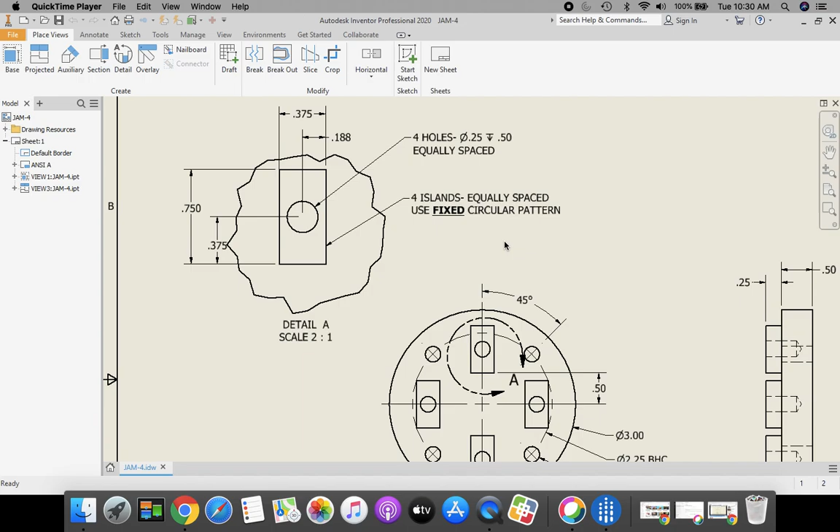We're also going to specify how to get this bolt circle to go around here, show you how to do that, and apply some center marks, all of which is new, along with an angular dimension as well. Let's have a little fun creating this IDW.

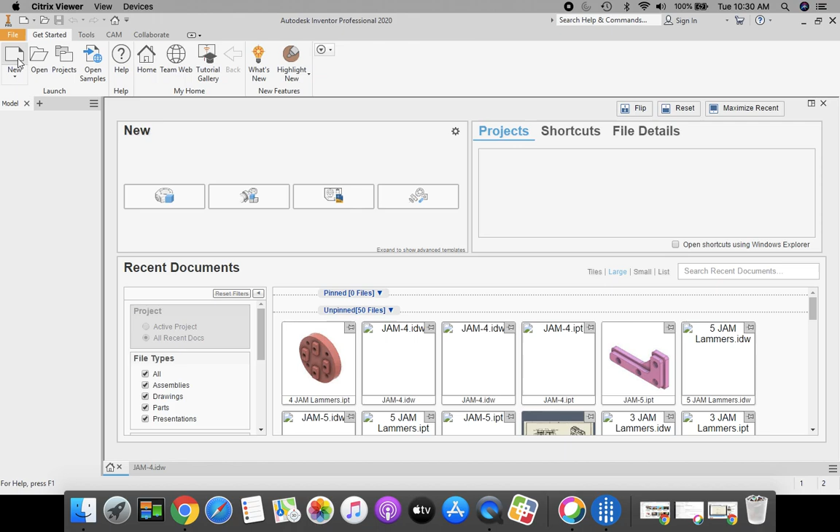In Inventor, we're going to go up to the top in our ribbon bar, select New, Standard IDW, this icon right here, and click Create.

Once again, we're going to change our sheet size from a D size sheet to a B size. So sheet size 1 over here. Put your cursor on sheet 1 in our model browser, right click, edit sheet, and we're going to choose B, and click OK.

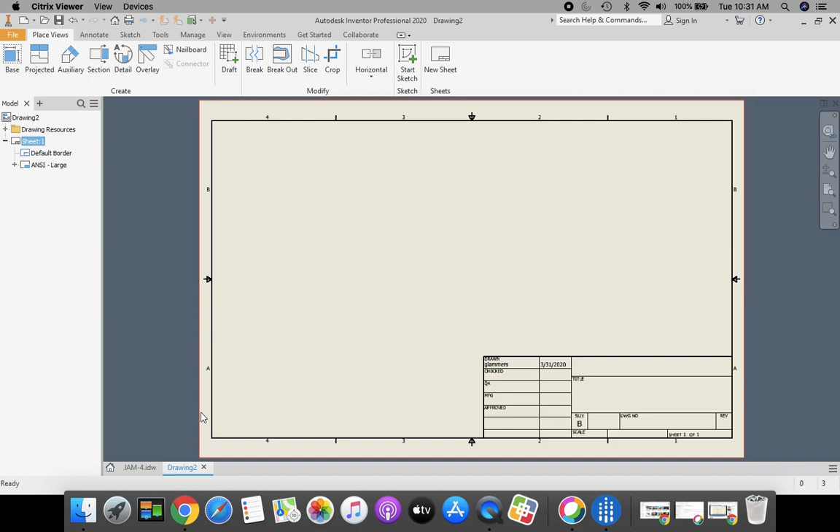That looks good. Next, let's place our view. Let's go up to the top in our ribbon bar and click Base. Go to your Browse folder with the magnifying glass.

You're going to scroll all the way down in your H drive and find your part. This is for Jam. My H drive is up here, gray box, green line underneath. Find your part, click Open.

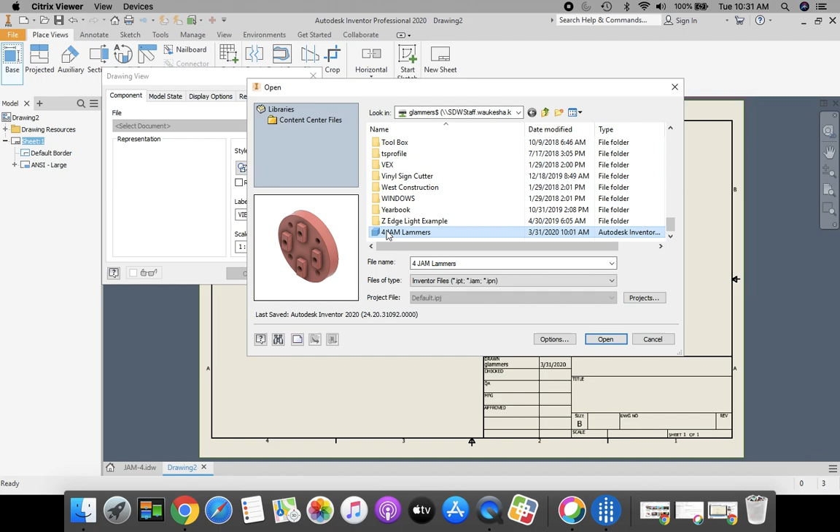Click OK. And I'm going to take my cursor and push my front view somewhere about here.

Next, I'm going to come up to the top and select Projected from our ribbon bar. Now, I have this part already attached to mine. However, if you click Projected and there's nothing attached to your cursor, bring your mouse to your front view, click, and it will connect for you.

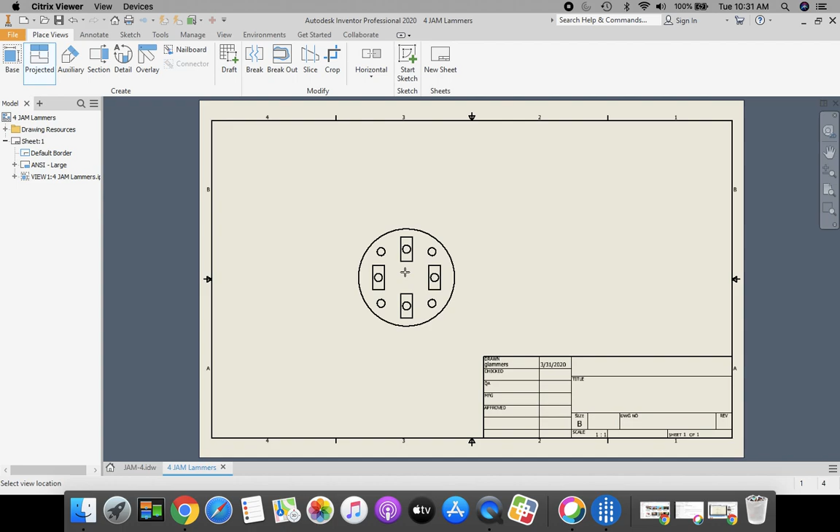And then we're going to place a right side view, a pictorial isometric view. Move your mouse up to the top right corner, and then right click and create. Those of you using your iPad may have to go up to that pull down window shade at the top and use your mouse tool in order to get the right click feature to create.

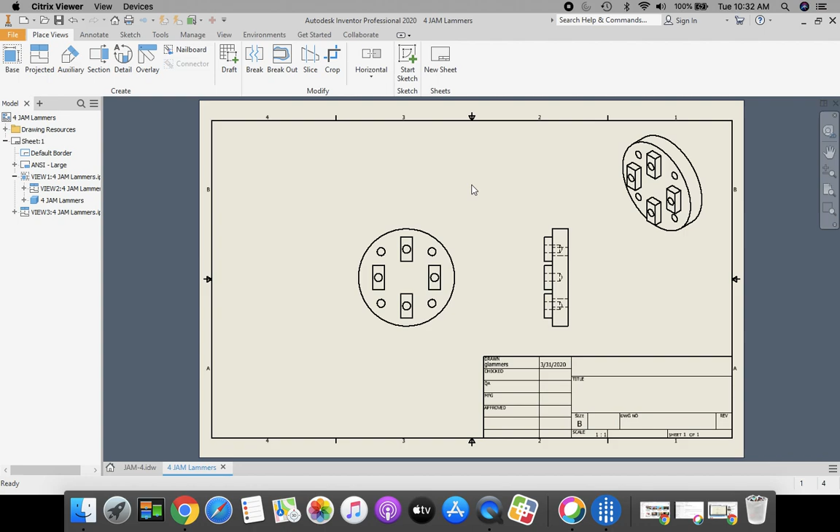Okay, now let's take a look at our front view here. We've worked with base, projected, and we did section in the last couple of these. Now we're going to go on to our detail. We're going to give a detail a try.

So click the detail tool. Now the way this works, you put your mouse where you want it to go, and it's kind of the center of that circle. You're going to click. That opens up this menu here.

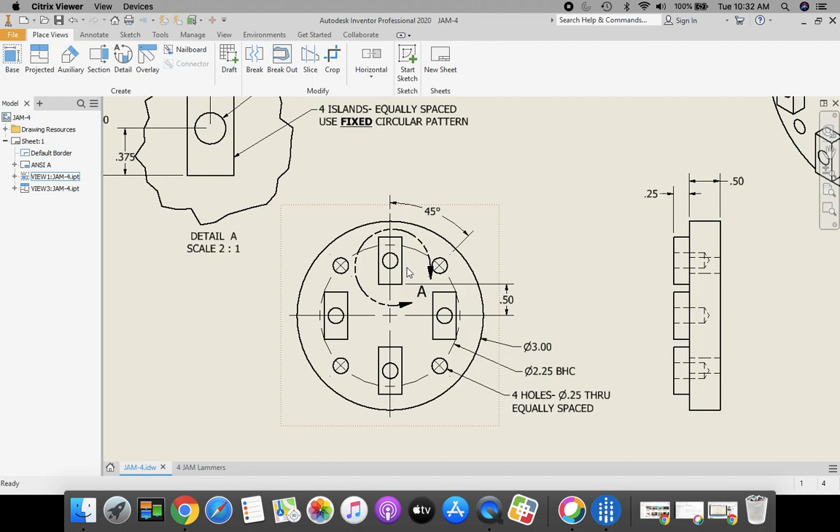Now we want the center of where we want that view circle to be. So if you take a look at this, do you see how it's going to create this detailed view? So where's the center of that? You can see I chose that right there.

So on my drawing, I'm going to click kind of the center of this circle as a good reference. Click, and I'm going to start stretching out this circle. Notice that anytime if you're not happy with the way that it's looking, just press escape and try it again.

Detail, click once to get that menu to pop up. Then we're going to click and stretch out a circle. It doesn't have to be perfect. We just want that full island in the middle of that circle.

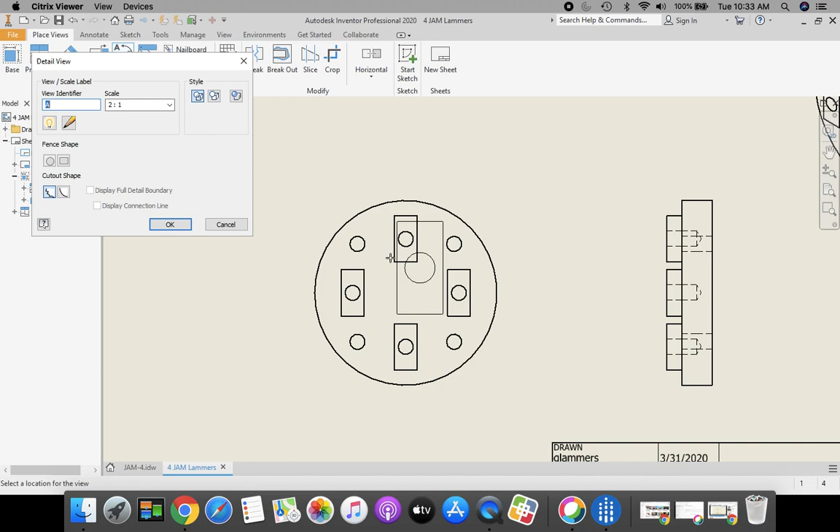Once you're happy, click, and now I have it attached to my cursor. Zoom all, magnifying glass piece of paper, and I'm going to come over here to the left-hand side of my page, and I'm going to click.

You can also take and move this around just like you can any other view that's in there. So after you place your dimensions, if you don't have enough room at the top, you can slide it down. Notice how the cutout version here around the outside looks different than the cutout version that's along my sheet.

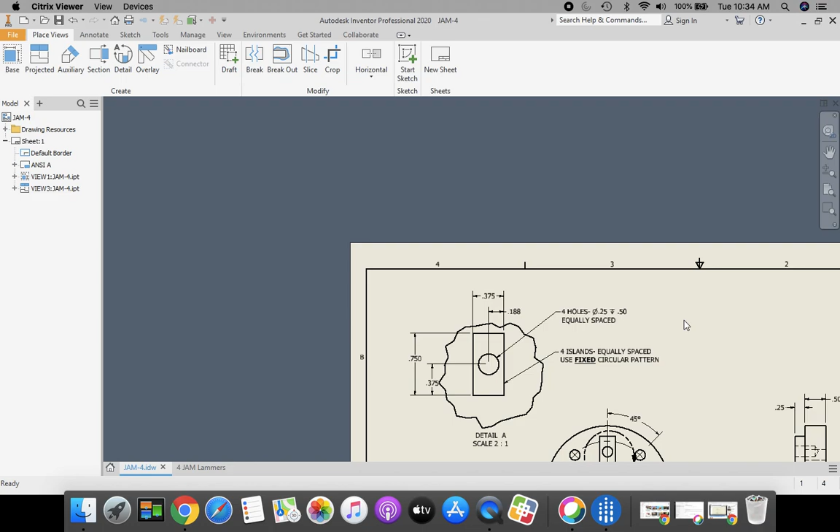And that's okay. That's just computer generated to show that it's material that's around there. So however it shows up is how it shows up. The main important part is this detailed area.

Now let's move on to our dimensions. Click your Annotate tab at the top. We're going to place our dimensions on, once again just matching the PDF drawing that we had originally created.

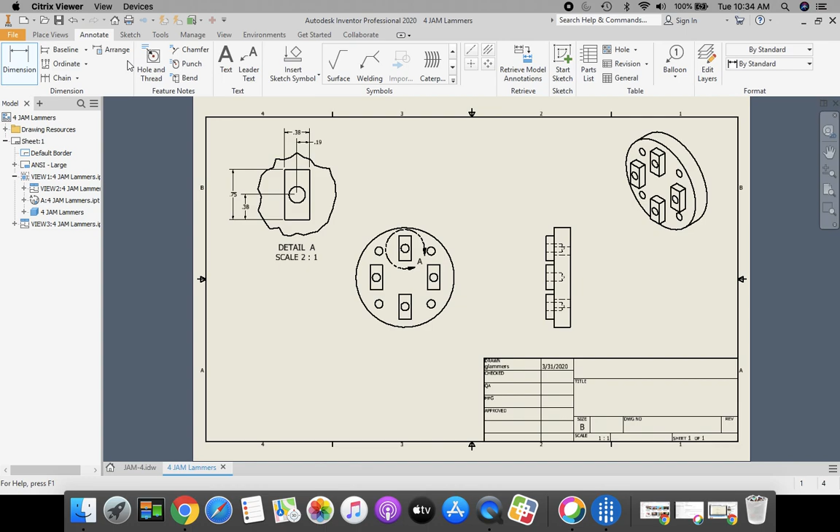We're going to place all those on, just matching the same ones that are there. For the hole that's in the middle, remember we used the hole and thread tool.

Okay, if you wanted to place a dimension on there for islands, we would have to use this leader and text.

So you can click on that, touch a spot on your island, bring that out, press enter with your keyboard, and then you can type

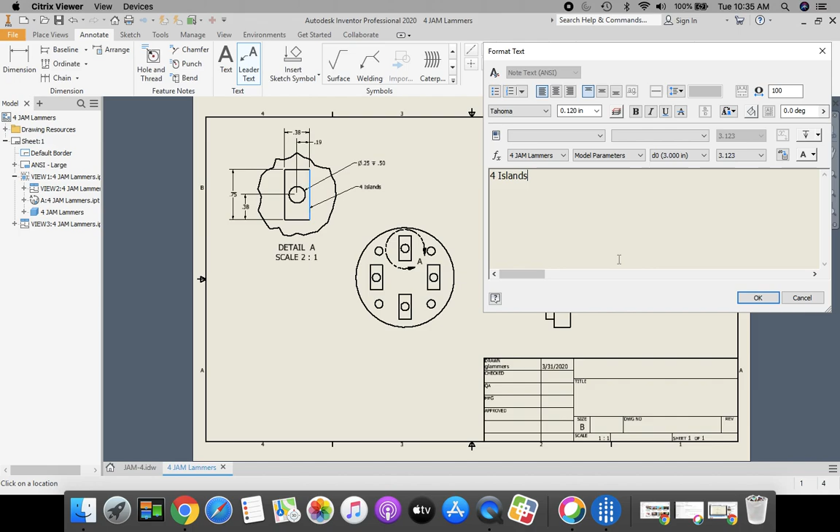4 islands and whatever other information you want to put in there. And when you're finished, just click OK, and it adds that note in there for us as well.

Let's move on, keep going around our dimensions. Let's take a look at our side view and our front view. So my side view, I have my thickness dimension and the thickness of those islands.

You see how that puts my 0.25 to the inside? I have to reverse that. So click the left side first, then the right side, and that'll put it into the right spot for you so that your dimensions are not overlapping.

Still with my dimension tool, I can click the outside of my circle here to place the overall dimension. I can place my hole dimension. Now I don't have to do anything with the islands because those are already specified up in the top.

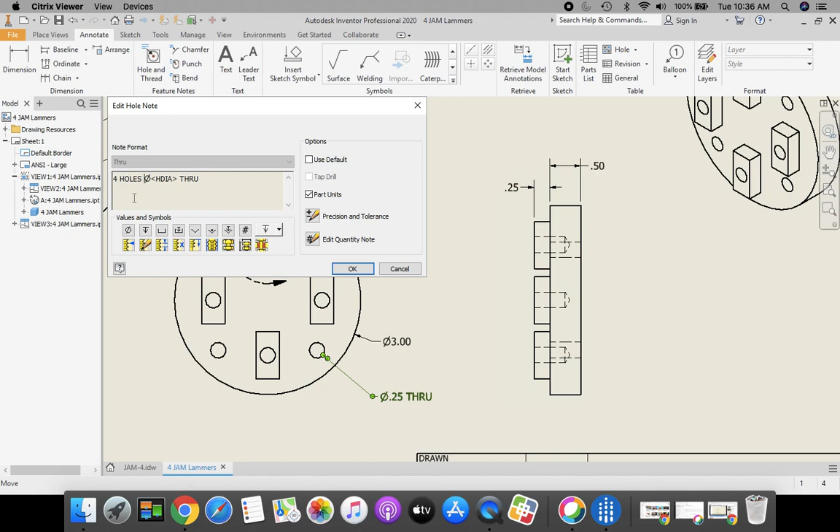I need this hole identified though. And if I want to, I can click on this dimension, put my cursor in the front window here, and add an additional note, 4 holes, click OK, and it adds it to my dimension down here.

Okay, that's cool. Now, if you take a look, I have that bolt hole circle going around here, and I have some other lines that are on here like this center mark. So we're going to show you how to do those because we need these center lines on there in order

to create my 45-degree dimension and to get this diameter for the bolt hole circle. Okay, let's show you how to do that.

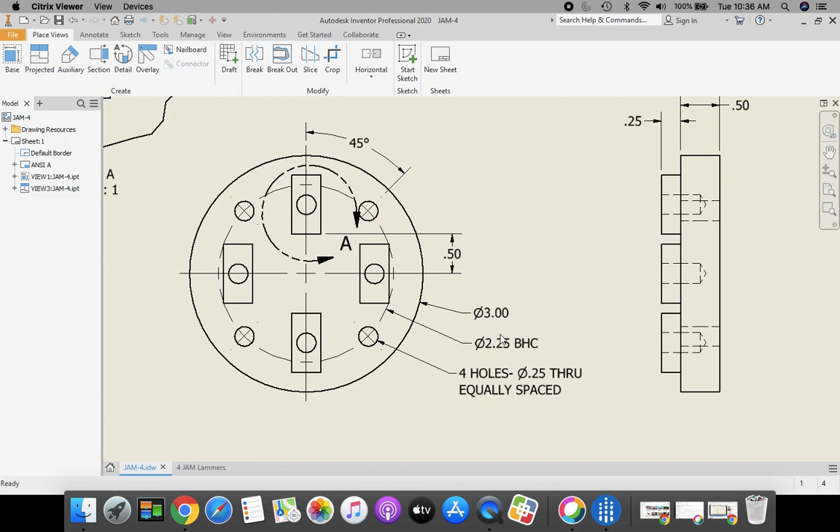Up in the top in our ribbon bar, I'm going to come up to my first area here where I have my center marks. I'm going to click that lower left one, that's a plain center mark, and I'm going to click the outside of my circle. And that puts a center mark right on the middle of my part.

Right above it, it has a center line. I'm going to click that, and I'm going to come around and click my first hole, click my second hole, and I realize it puts it into a straight line, but I'm coming over to my third hole, and now it turns into a circular.

Do you see that? Click my fourth hole, and then with your mouse tool on an iPad, or right click, click create. Remember, you have to do that with your iPad.

You have to go up to that shade at the top in order to get your mouse and then use the right click feature on it. Now we have our bolt hole circle on there.

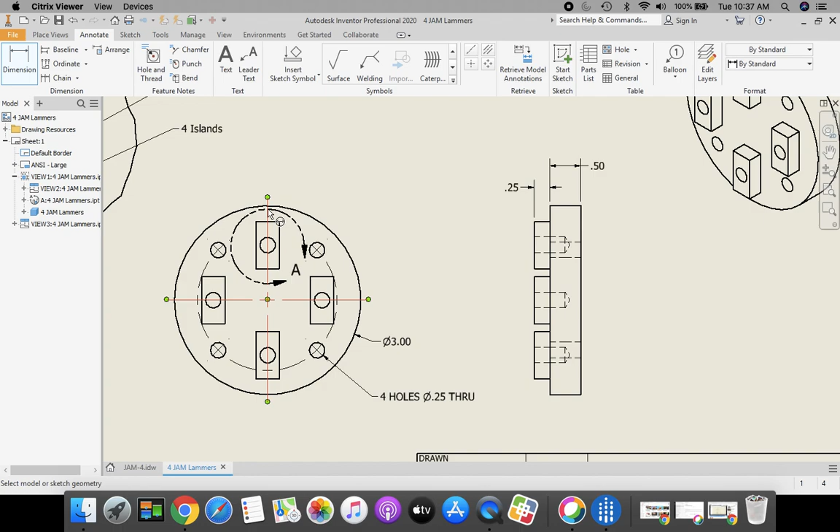We have our center mark. Now we can identify some of these other ones. For example, that angular one. I need to click my center mark in the middle, and then I'm going to come in here, and I don't want that circle part of that center line. I want the angled line for that hole on that center mark.

And now I get my 45 degrees. Okay, let me show you how to do that again. I'll click undo.

Dimension. I'm going to click my main center mark. That's the one that goes all the way through the middle. And then I'm going to come over to my hole that's over here. And you see how it's divided into the red circle and this red vertical line.

Okay, that's at an angle. That's the one that I want, is the one that's at an angle. Click, and that gives me my 45 degrees.

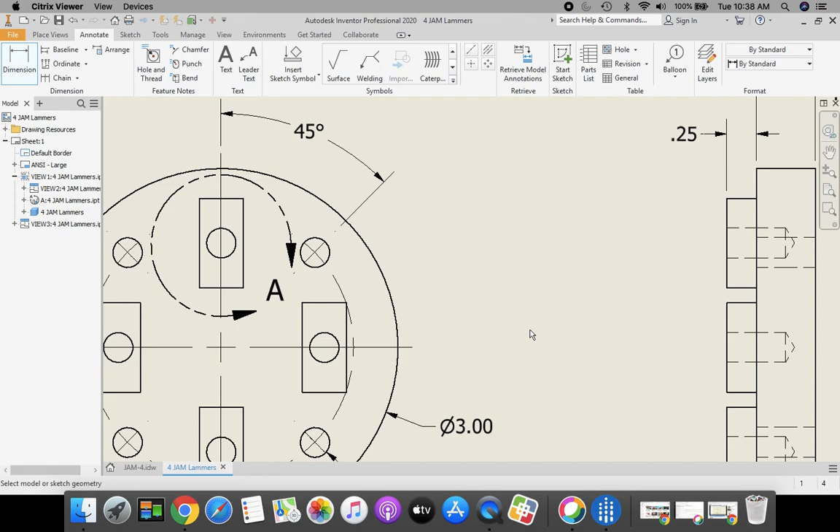Okay. Next, I need that bolt hole circle dimension as well. So with my dimension tool, I'm going to click that circle that makes the red center mark going around and bring this out to there. Okay, that looks great. You have all the information that you need.

We need one more that is on here, and that's how high off the center mark to the bottom of this rectangle. Then we're finished. So I'm going to click my center mark, bottom of that rectangle, bring that dimension out, and that adds and

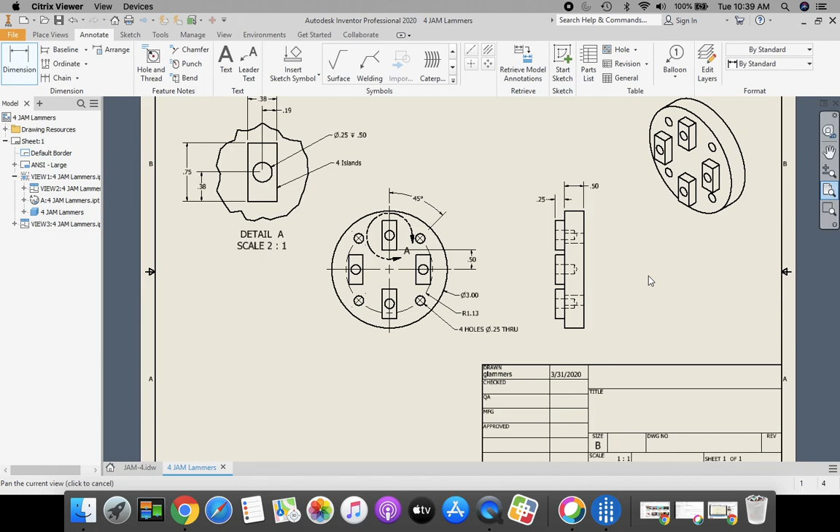finishes up our dimensions. Okay, let's go up to the top, go to Orange File, let's go down to Save As. We're going to make sure that this is going into our H drive. First initial, last name dollar sign. That's from the pull down menu all the way down to the bottom.

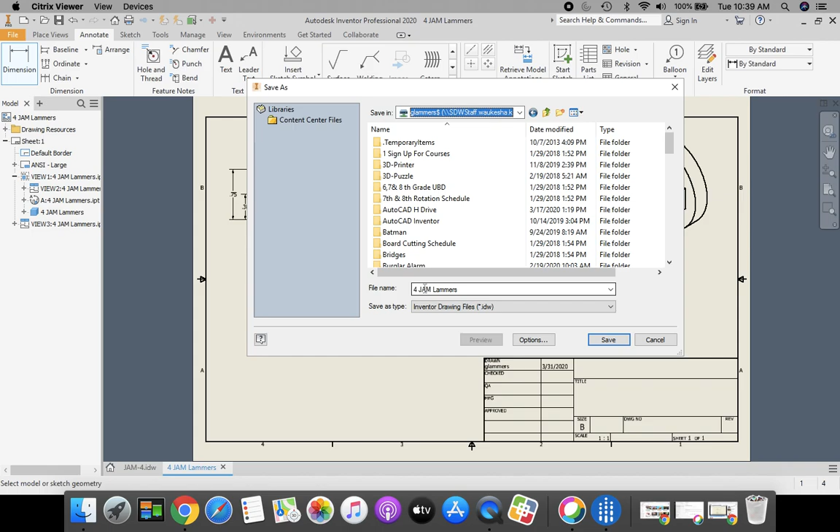Has that gray box with the green line underneath of it. My part name still is 4 JAM Lammers. You're going to have your last name in there and click Save.

Now to get this into the format that we can take and turn it in to Google Classroom, we're going to come up to the orange file on the left hand side, go down to Export, and we're going to export

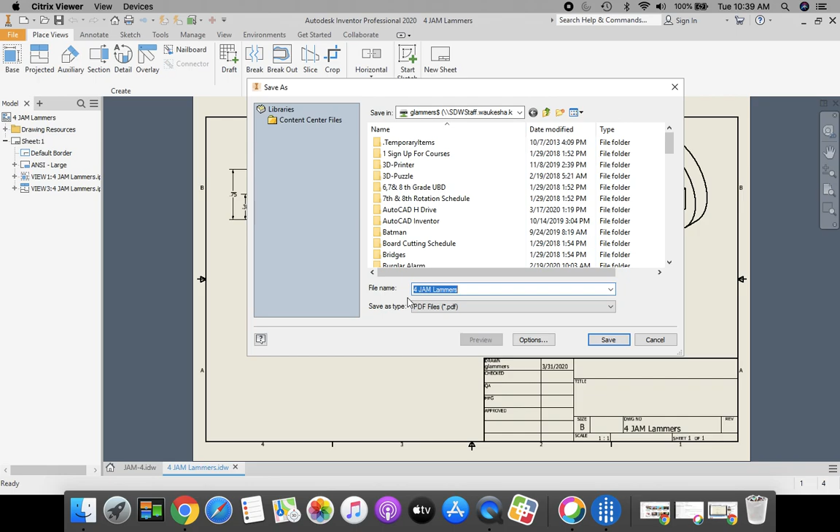PDF. Once again into my H drive, still have my file name is correct, and click Save. And that exports it to our H drive, and from there you can take and turn it into Google Classroom.